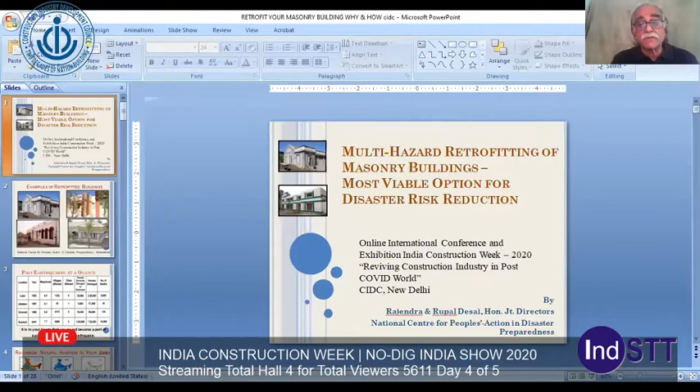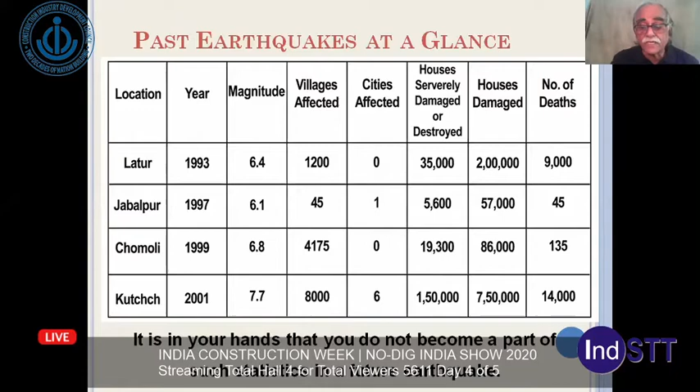And they also mean that the funds which are meant for development get transferred for the reconstruction. So looking at all these different hazards that we have, such as seismic, high-speed wind, and flood, the buildings which are vulnerable to a particular hazard are likely to suffer damage and pose danger to the occupants if that hazard strikes.

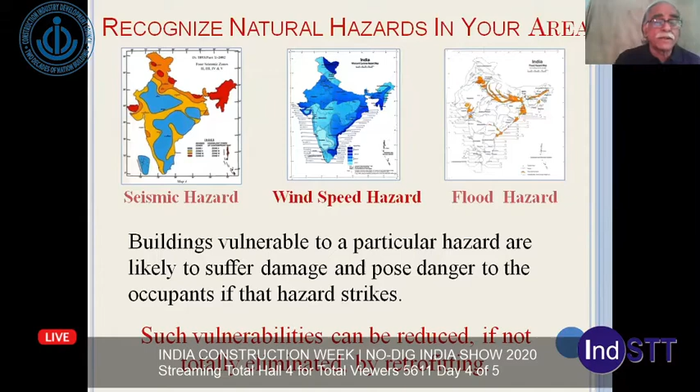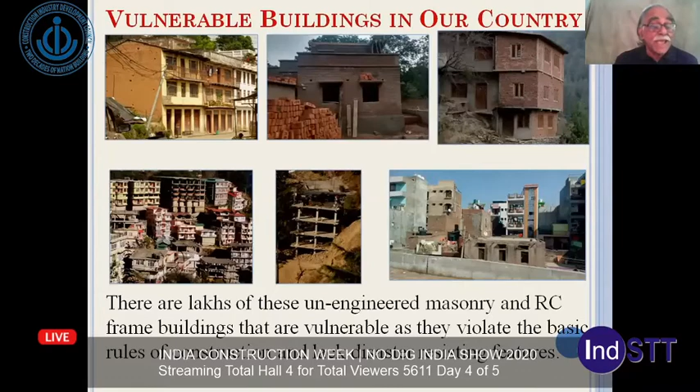Now, such vulnerabilities can be reduced, if not totally eliminated, by retrofitting. In India, we have lakhs of these unengineered masonry and reinforced concrete frame buildings that are vulnerable as they violate the basic rules of construction, and also they lack the disaster resisting features.

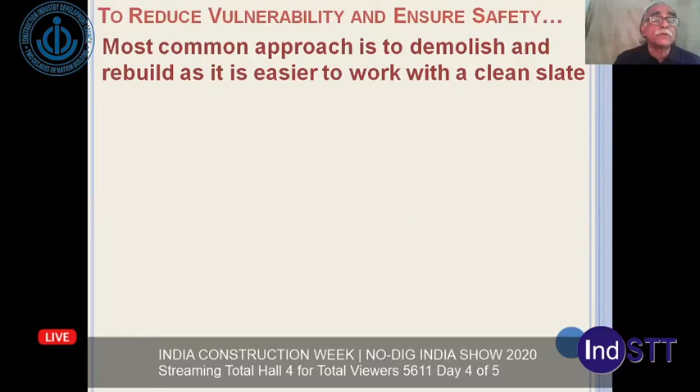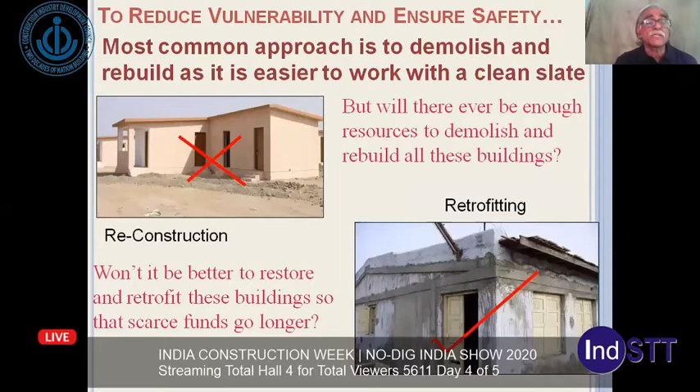Now, to reduce the vulnerability and ensure safety, the most common approach has been to demolish and rebuild, as it's easier to work with a clean slate. But the question is, will we ever have enough resources to demolish and rebuild all these buildings? Won't it be better to restore and retrofit this building so that scarce resources can go much longer?

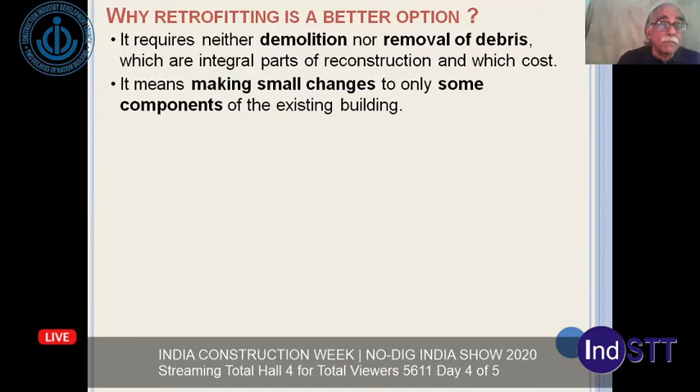Now, why is retrofitting a better option? Number one, it requires neither demolition nor removal of debris, which are integral parts of reconstruction and which cost a lot of money. Number two, it involves making small changes only to some components of the existing building. And this means that it's 5 times cheaper and faster than reconstruction.

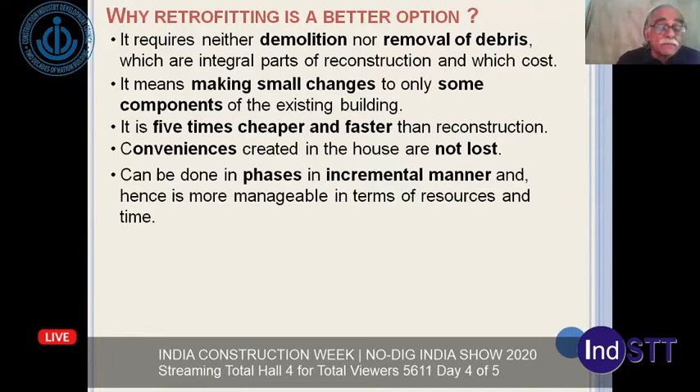Conveniences which were created in the house or the building are not entirely lost. And it can be done in phases and incremental manner so that it becomes more manageable in terms of resources and time. And in today's day of global warming and climate change, this is the most important attribute, that it's the greenest option for reducing vulnerability.

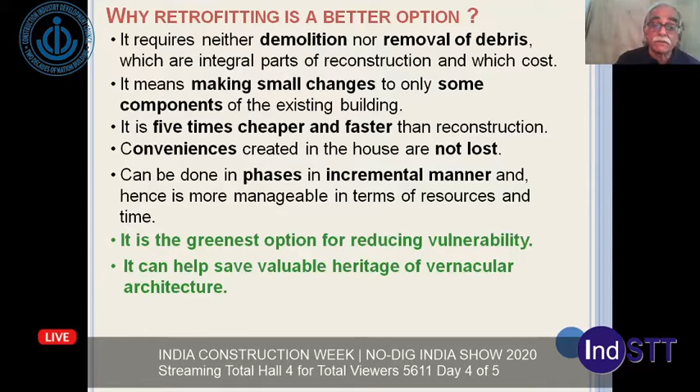This retrofitting can also help save valuable heritage of the vernacular architecture, since people will not have to demolish their old buildings. And finally, this can ensure long-term safety against future hazards for the most number of people with the least amount of money and time, with minimum hardship.

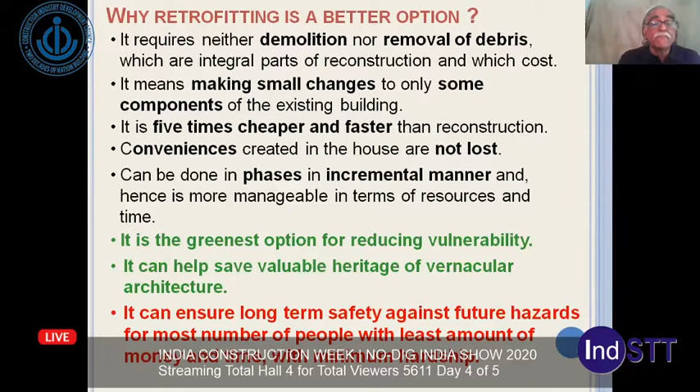Now, looking at the weaknesses in masonry construction, they are best manifested during a disaster, such as the picture on the left just implies that the masonry is poor, or the picture on the right, it clearly says that the wall-to-wall connection simply did not exist.

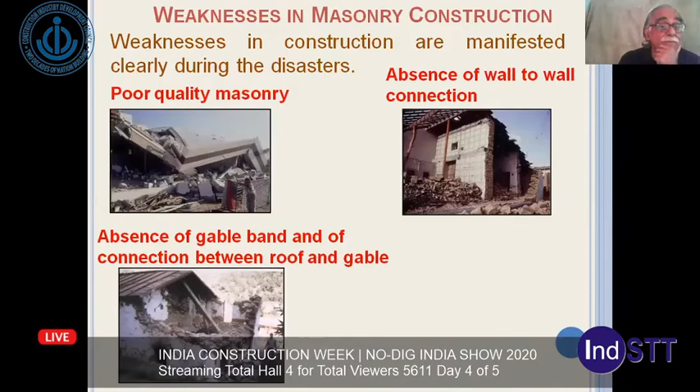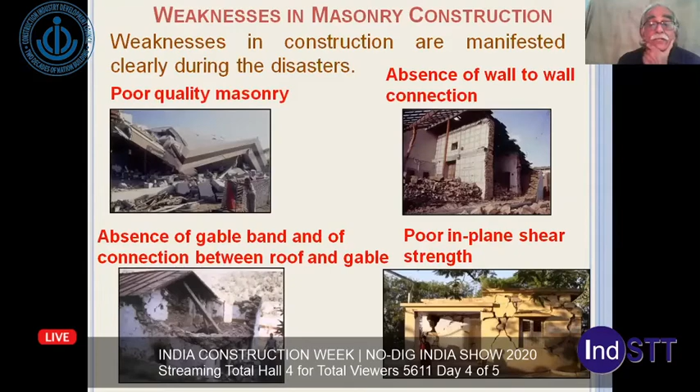Picture on the bottom left says that the gable band was missing and the connection between the gable and the roof was missing, and the diagonal cracks like these in the lower right-hand picture shows that the in-plane shear strength is less. The delamination of random rubble

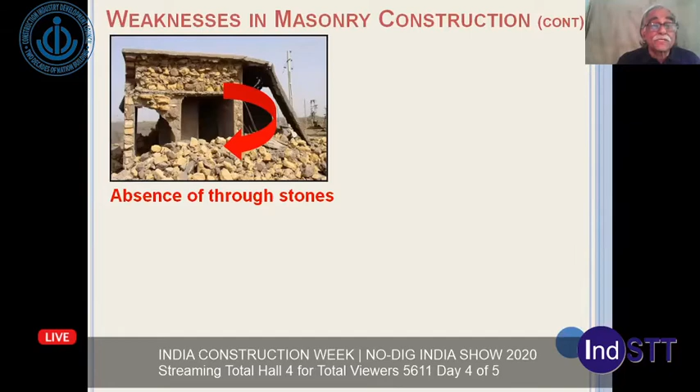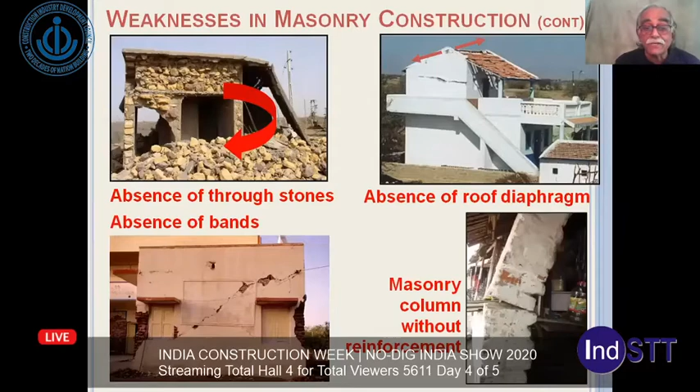walls is most common, and it happened because of absence of through stones. And the horizontal crack at the base of the gable just indicates that the roof diaphragm is not there. The diagonal crack like this also indicates that the bands are missing. And a cracked column of masonry simply says that reinforcement is not there.

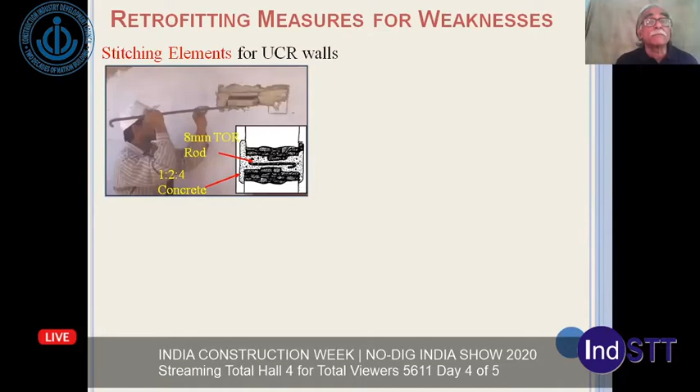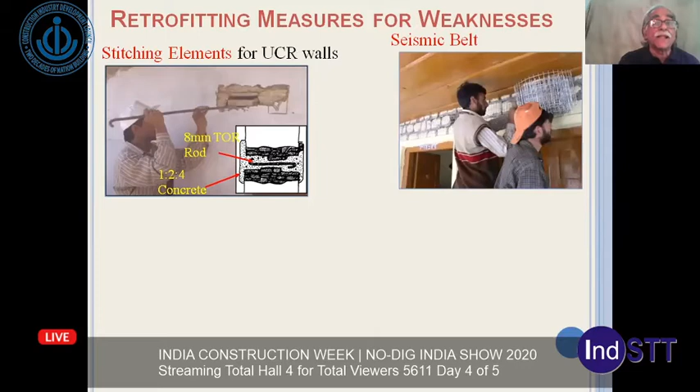Now, for each weakness, there is a retrofitting measure, such as for random rubble masonry, one can put in cast-in-situ stitching elements so that delamination does not take place, and one can install seismic belts at different levels. And for the vertical reinforcement, splints can be installed on the wall corners.

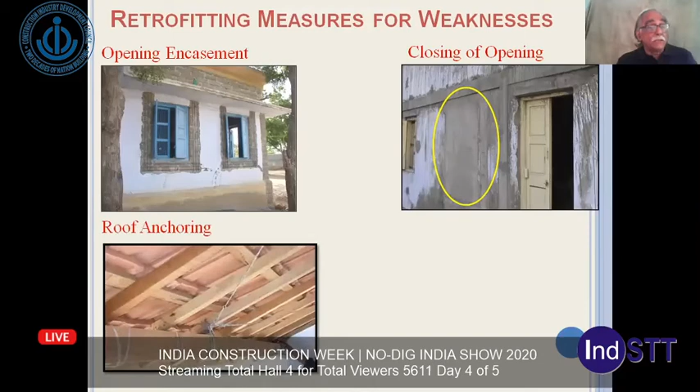The openings can be encased with weld mesh, and if there are too many openings, even a few of the openings can be closed. And the roof can be anchored using GI wires or other simple means.

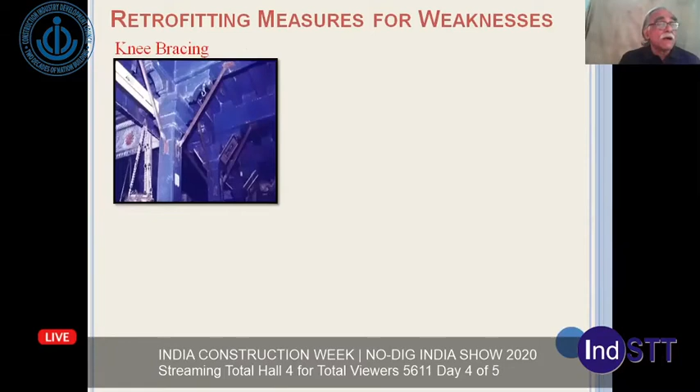And similarly, the RCC slabs also can be anchored to the wall. Timber frames can be strengthened using knee braces, and the masonry pillars can be jacketed, and roof diaphragms can be created by installing diagonal bracings.

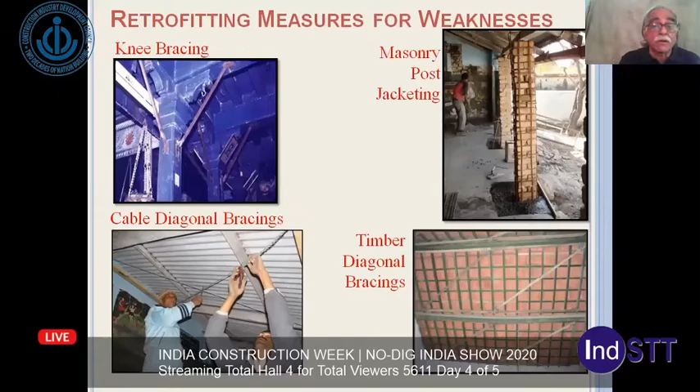Now, we have retrofitted over 800 masonry buildings in the last 26 years in seismic zones 3, 4, and 5 of the subcontinent. It all started back in the Latur earthquake, and then came the Chamoli earthquake in Uttarakhand in 2000,

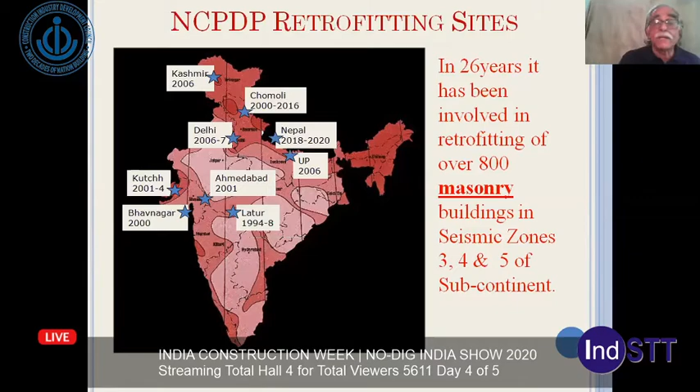and then came the Kutch earthquake, where we worked in Ahmedabad as well as large parts of Gujarat, and then came the Kashmir earthquake and our interventions in 2006 and 7, and then our interventions in Delhi and UP, and finally came the Nepal earthquake of 2015.

Now, in Latur, we retrofitted 150 houses with the house owners' funds, and these were done under Professor Arya's guidance.

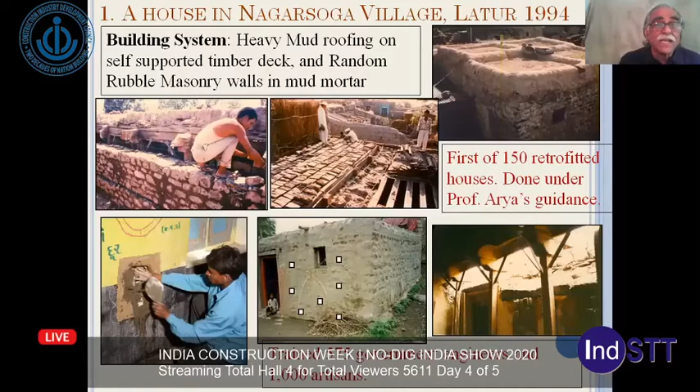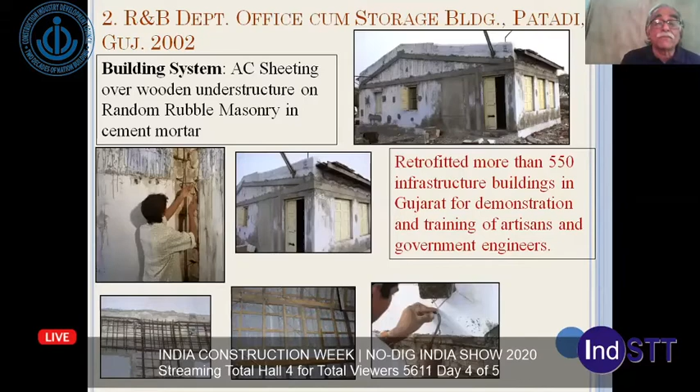It involved the retrofitting of heavy mud roofing supported on random rubble masonry mud mortar, along with training 575 government engineers and 1,000 building artisans. In Gujarat, after the Kutch earthquake, we were party to retrofitting 550 infrastructure buildings of different masonry types, which also involved large-scale training of artisans and government engineers.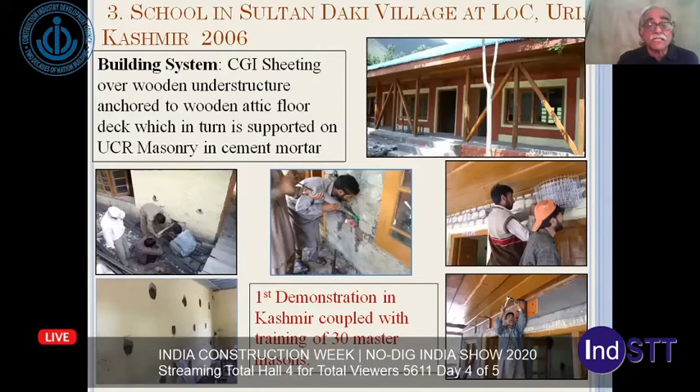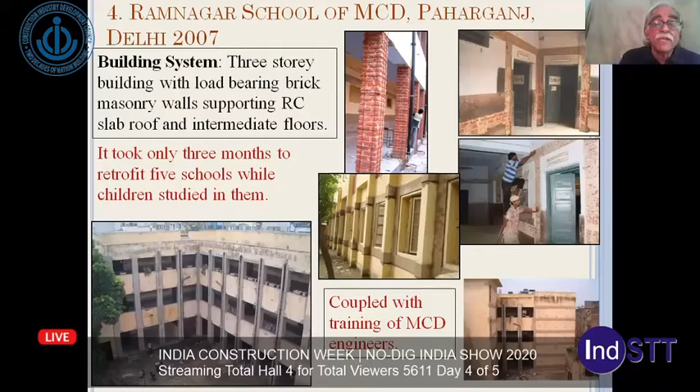In Kashmir, we did the first demonstration retrofitting of random rubble masonry with tin roof, training 30 master craftsmen. In Delhi, as a pre-disaster intervention for the Government of India, we retrofitted 5 masonry schools up to 3 stories high, built with brick masonry and cement mortar, coupled with training of Municipal Corporation of Delhi engineers.

Also in Kashmir, we retrofitted a large subdivisional hospital with the help of a class 1 contractor that we had to train. Most interestingly, it took only 2 months to retrofit this huge building, even though the outpatient department did not permit us to work inside the building until 2 p.m. in the afternoon.

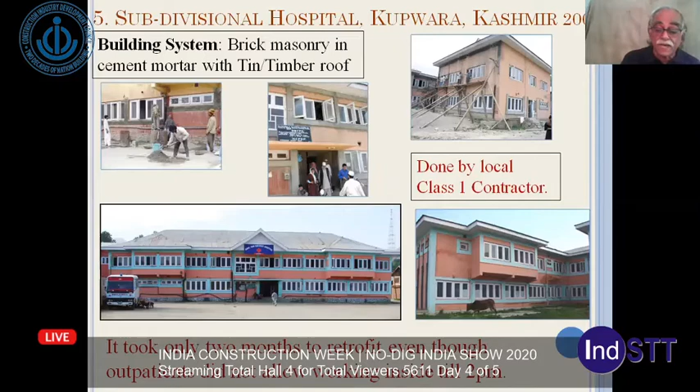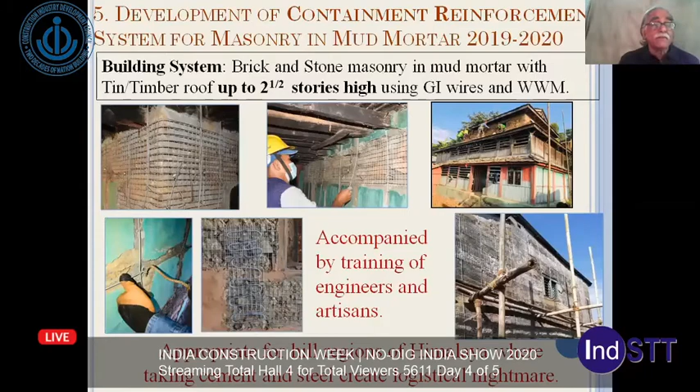Finally, in recent years, we evolved a containment reinforcement system to retrofit brick and stone masonry mud mortar buildings up to 2.5 stories high using GI wires and weld wire mesh. This too was accompanied with training of a large number of engineers and artisans. This option is appropriate for the hill regions of Himalaya, where bringing in cement and steel creates a logistical nightmare.

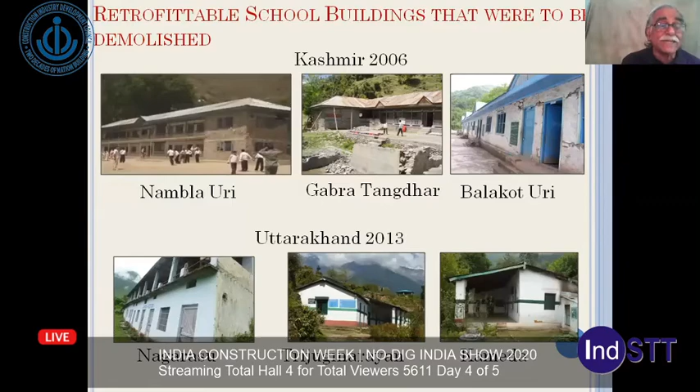I would also like to show buildings which have been demolished instead of retrofitted, such as school buildings in Kashmir. A number of school buildings were damaged but could have been easily retrofitted, yet they were ultimately demolished. Similarly, after the 2013 Uttarakhand Kedarnath tragedy, a large number of school buildings which were only lightly damaged were scheduled for demolition instead of retrofitting.

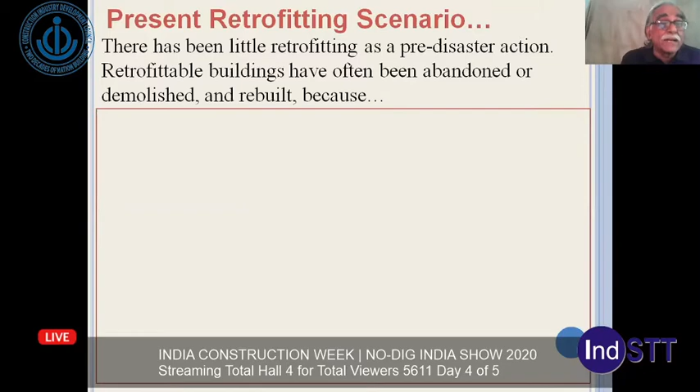The present scenario of retrofitting shows that there has been very little pre-disaster action, and retrofittable buildings have been abandoned or demolished and rebuilt instead, primarily because most engineers, who are the principal actors, are ignorant about it and find it more painstaking, and hence they don't recommend it. So few authorities promote retrofitting without the endorsement of their own engineers.

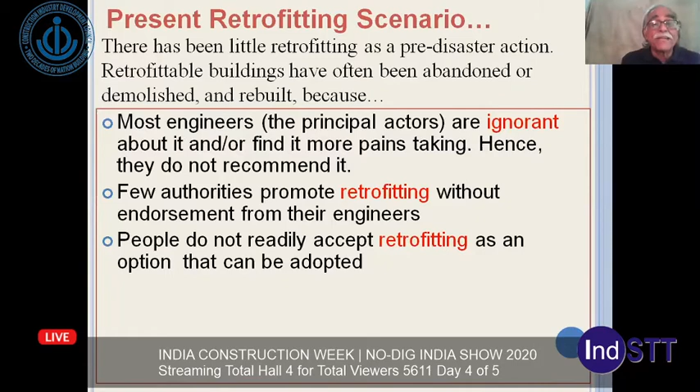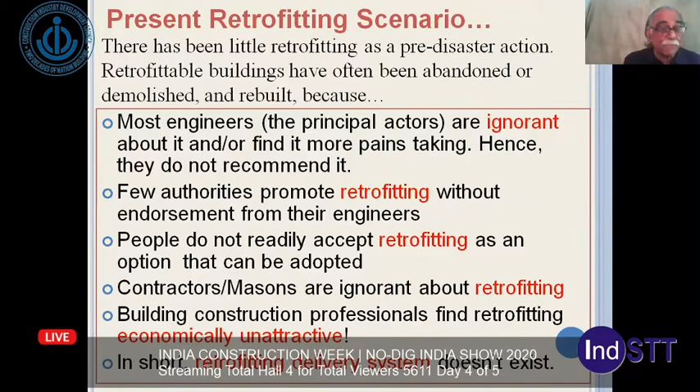People do not readily accept retrofitting as they find it rather abstract. Contractors and masons are ignorant about retrofitting. Building professionals find retrofitting economically unattractive—too much trouble for them. So in short, the retrofitting delivery system does not exist.

When it comes to know-how and guidelines, IS 13935, the Bureau of Indian Standards for Repair and Seismic Strengthening of Buildings, has been there for a long time, and we have extensively used it. With that, and the on-ground execution of retrofitting of local masonry variants for demonstration as well as hands-on training of artisans and engineers, we have been able to produce a number of manuals and guidebooks, starting in Latur, then Kashmir, then Himachal Pradesh and Uttarakhand, and finally Nepal.

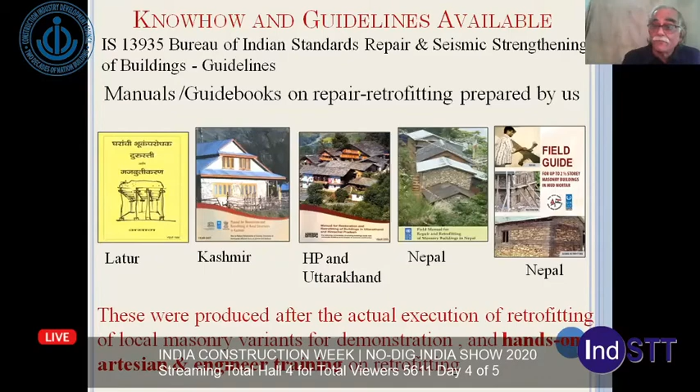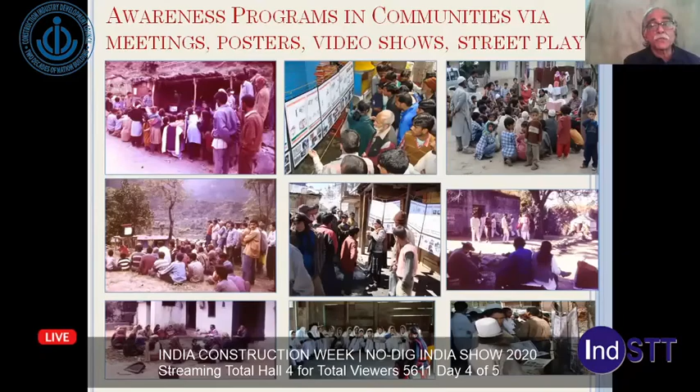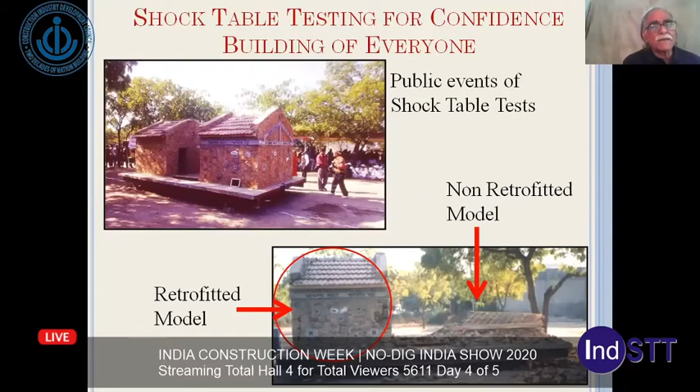All these were accompanied with awareness programs in the communities via meetings, video shows, poster shows, street plays, and also confidence building exercises. This was done using a shock table, and a lot of them were public events. We also made videos which were later used for confidence building.

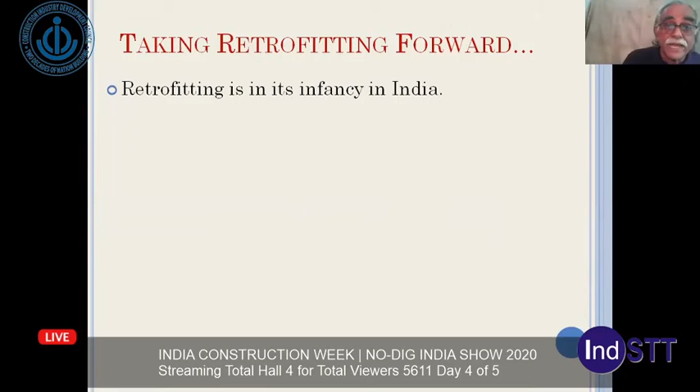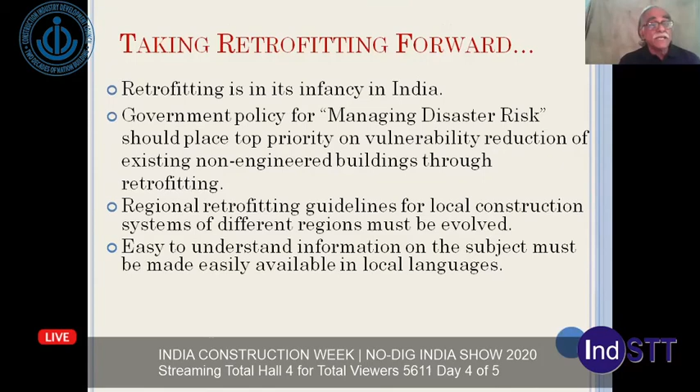Taking retrofitting forward, retrofitting today is in its infancy—we must understand that. Government policy for managing disaster risk should place top priority on vulnerability reduction of existing non-engineered buildings through retrofitting. For this, regional retrofitting guidelines for local construction systems of different regions must be evolved, and easy-to-understand information on the subject must be made easily available in local languages.

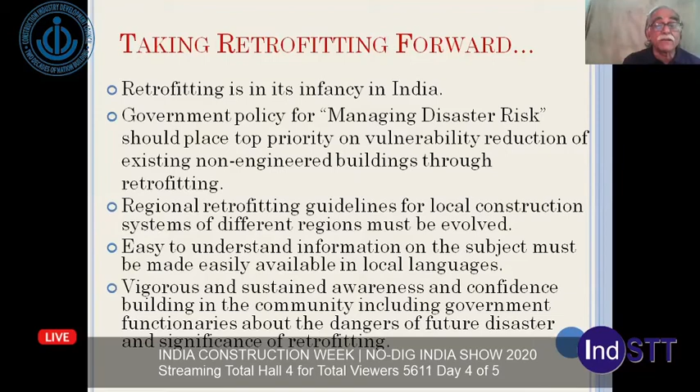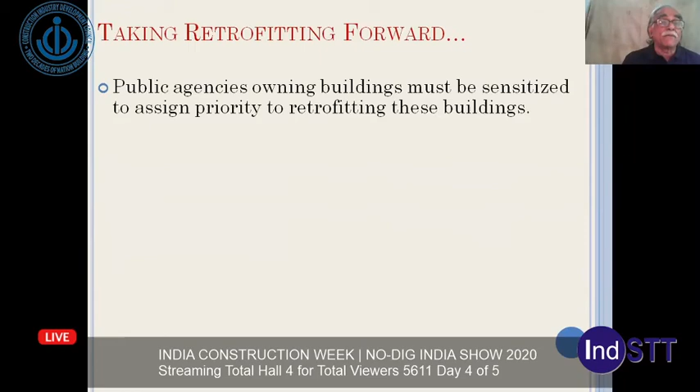This must be accompanied with vigorous and sustained awareness and confidence building of communities at large. Along with this, public agencies owning buildings must be sensitized to assign due priority to retrofitting their buildings, and materials required for retrofitting must be made available.

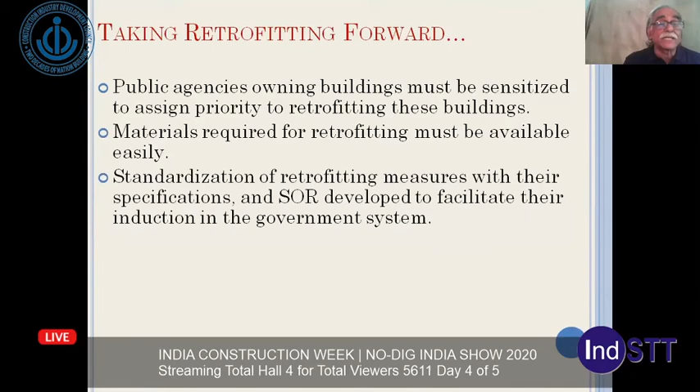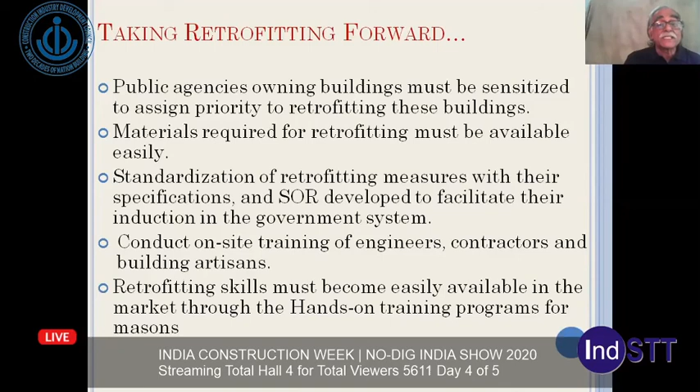Standardization of retrofitting measures needs to be done, and a schedule of rates needs to be developed so it can be inducted into the government system. Needless to say, we need to conduct on-site training of engineers, contractors, and building artisans in retrofitting, so that retrofitting skills become easily available in the market. Finally, through all this, we create the retrofitting delivery system.

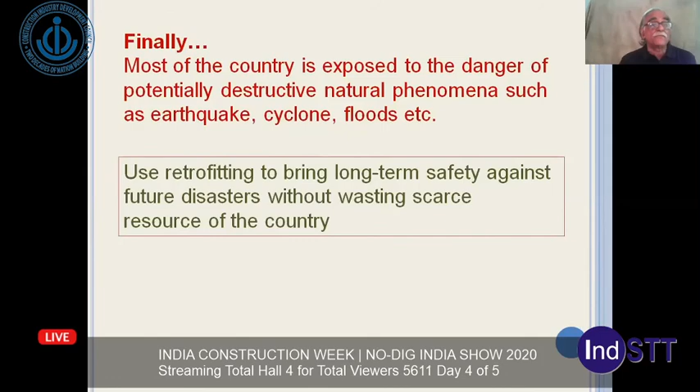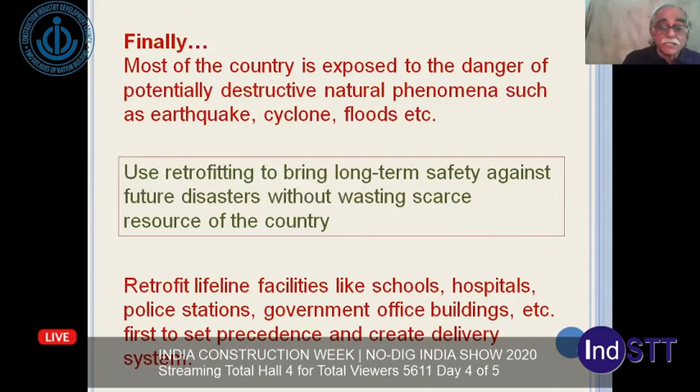Most of the country is exposed to the danger of potential destructive natural phenomena such as earthquakes, cyclones, and floods. We need to use retrofitting to bring long-term safety against future disasters without wasting the scarce resources of the country. Ideally, it will be best to retrofit the lifeline facilities first, such as schools, hospitals, police stations, and government offices, to set the precedent and simultaneously create the delivery system.

I'll end by saying that, as the saying goes, best is the enemy of better. Instead of full retrofitting, even partial retrofitting that the funds permit will reduce vulnerability and bring safety. Thank you.